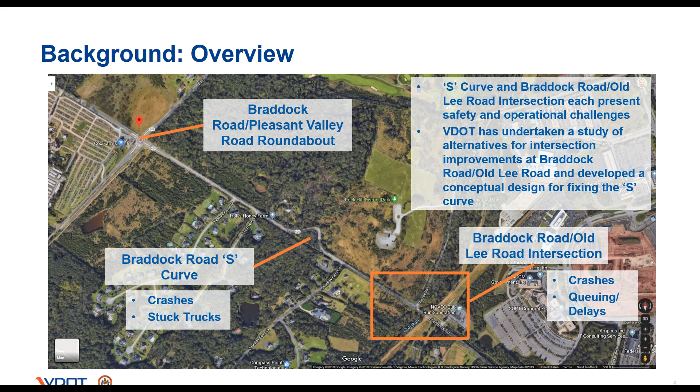Now on to slide 7. And this slide shows the crash history in greater detail, covering the period from 2006 to the present, as well as the number of stuck trucks from 2010 to 2017. In total, during these respective time periods, we had 115 crashes and 18 stuck trucks in the area of the S-curve. We also had 34 crashes at the Braddock and Old Lee intersection, and moving further north on Old Lee, 27 crashes at the curve as you head towards Stonecroft Boulevard.

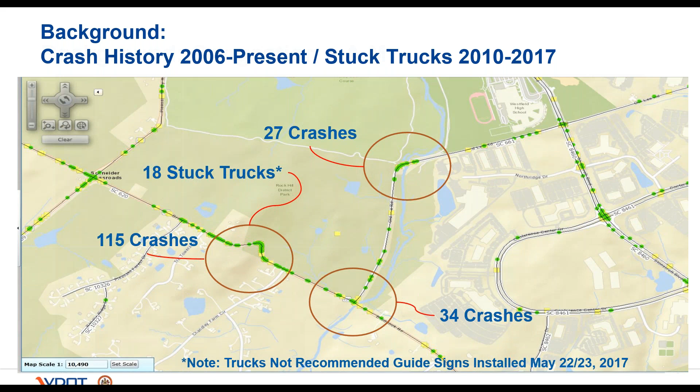Our next slide is slide 8. From a congestion standpoint, in the morning we have a heavy eastbound flow on Braddock, with many vehicles looking to make the eastbound left onto Old Lee Road. This leads to queuing and delays as vehicles wait for an acceptable gap to make their left turn maneuver.

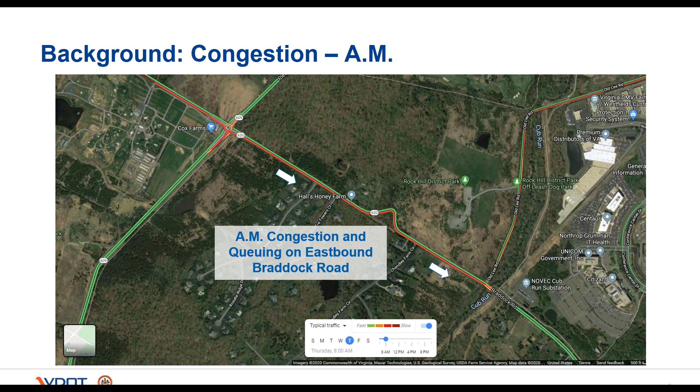Next on slide 9, you can see in the evenings, many of those same vehicles are making the return trip on southbound Old Lee to make a right turn. In addition, there are some vehicles traveling southbound on Old Lee looking to make a left turn on Braddock. And this can exacerbate the situation given the approach configuration that we currently have, and often leads to additional queuing and delays. So as you can see, based on both the crash and congestion data, this location has an existing safety and operational problem that needs to be addressed.

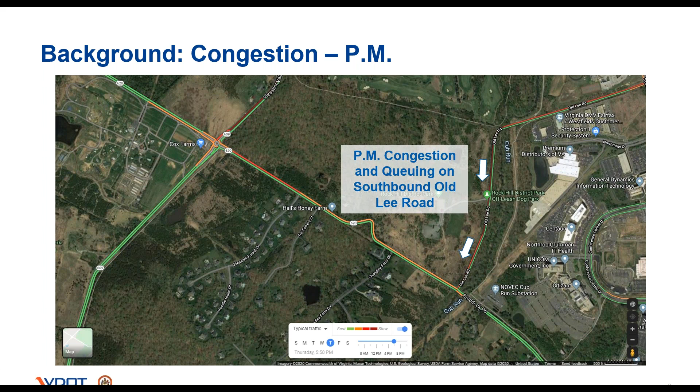Our next slide, slide 10. Given those safety and operational concerns, the study team looked at multiple alternatives to improve the Braddock and Old Lee intersection in conjunction with realigning the S-curve. And each of the alternatives that I'm going to show you focus in on the intersection itself. I would note that none of the alternatives that I'm going to cover have been through an environmental process at this point. As mentioned at the beginning of the presentation, this will occur once a project is funded and preliminary engineering has commenced. And we'll also discuss this in a little bit greater detail later in the presentation.

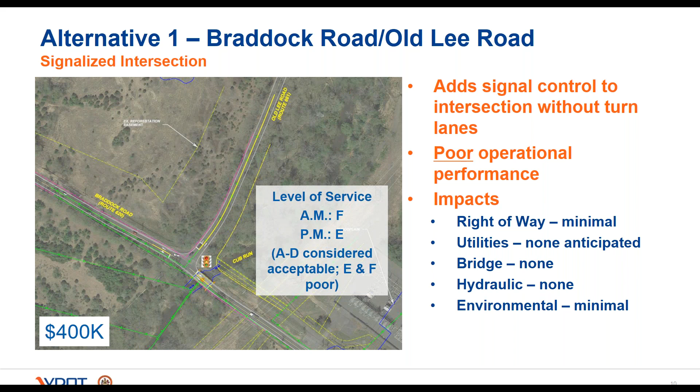Getting on to the first alternative, this alternative adds a traffic signal to the intersection without turn lanes. And while this would be the least impactful in each of the categories that we examined, which includes right-of-way, utilities, bridge impacts, hydraulic, and environmental, our analysis showed that it had poor operational performance with continued queuing and delay into the future.

Moving on to slide 11, our next alternative, alternative 2, added both a signal and a 200-foot southbound turn lane. With this option, we did see an improvement in operations overall, but without geometric improvements along Braddock, the eastbound AM queues still persisted. And impacts increased with the addition of the turn lane, with right-of-way required from Rock Hill District Park and impacts to utilities on the north side of Braddock Road. Stormwater management and environmental impacts would also need to be considered. So moving on to our next slide, slide 12.

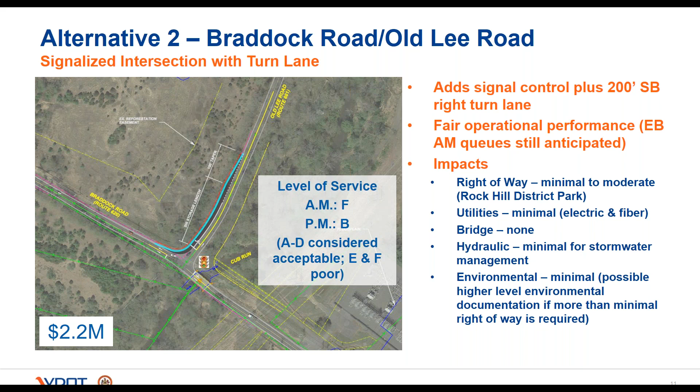Alternative 3 builds on Alternative 2 and adds an 1,100-foot jug handle lane to accommodate eastbound left turns, essentially providing an at-grade ramp to allow jug handle users to make the left turn indirectly. And those who attended our previous meeting in February will recall that this alternative was the staff preferred alternative. And while this alternative does offer fair to good performance from an operational perspective, the jug handle has moderate right-of-way and utility impacts and would potentially require additional hydraulic and environmental studies.

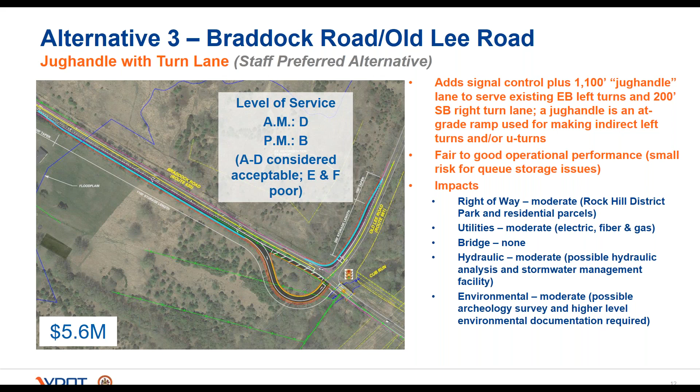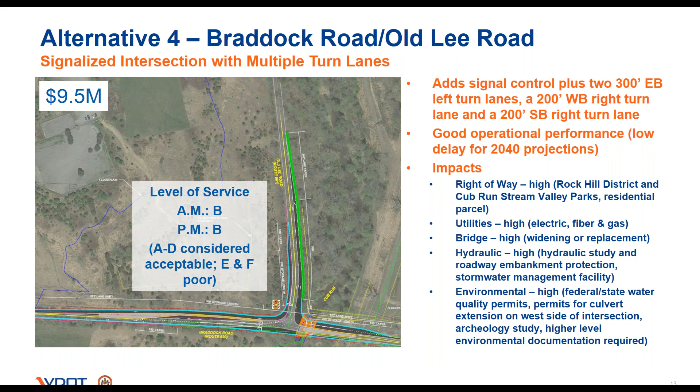For those of you who attended the meeting in February, you may recall that VDOT developed a decision matrix to facilitate choosing the staff preferred alternative. This slide shows a slightly updated version of that matrix, with each alternative receiving a rating for its operational performance, safety, and impacts in the various categories shown. It also includes the implementation schedule for each of the alternatives, as well as costs.

Now, as discussed, Alternative 1 had minimal impacts, but it did have poor operational performance. Alternative 2 had slightly improved performance, but had more impacts, primarily from the southbound right turn lane. Alternative 3 showed fair to good performance with additional impacts on the south side of Braddock, and Alternatives 4 and 5 had good performance, but with additional impacts, including environmental. They also had longer implementation schedules and higher cost. So based on this analysis and the matrix exercise, staff designated Alternative 3 as the preferred alternative.

Moving on to slide 16. Looking at the staff preferred alternative in greater detail, on this slide you can see an updated sketch of the combined project, including the S-curve. The sketch is broken into two halves, with the S-curve shown in the upper left corner and the Braddock Old Lee improvements shown in the lower right.

Again, for the S-curve portion of the project, the curve would be realigned to address the existing issue of crashes and stuck trucks. It would also add a shared use path connection along the north side of the road. And then on the eastern end of the project would be the improvements at Braddock and Old Lee, including the jughandle and southbound right turn lane. And lastly, the shared use path would continue to Old Lee. Moving on to slide 17.

Before we actually discuss the selected alternative for the study, I did want to take a few minutes to go over some of the feedback that we received at the February public information meeting. I will say, in general, feedback was somewhat mixed in terms of the alternatives with no clear consensus. But there were a number of specific items that came up that we did want to address this evening.

So during that meeting, some of you expressed a desire to see the long-term comprehensive plan alignment for Braddock and Old Lee implemented. And there are some very significant challenges associated with this option. First of all, cost. We estimate that this project would cost anywhere from $70 to $80 million, and there are currently no funds allocated to it. Second, we know that the comp plan alignment will have its own environmental impacts requiring evaluation. And we would also note that the revised alignment calls for 4 lanes for the new alignment.

On the slide showing the selected alternative, it says slide 16 or 17. Is all the land on county easements, or does it impact private property in Sully Estates? Okay. So we're talking about this slide. Based on the question, yeah, it says either slide 16 or 17. Okay, and I might ask if our consultant team could speak to that, since they're a little closer to that information.

Yeah, again, these are very early on layouts of the roadway. The one impact to private property is where the actual jughandle is. That would have to be looked at and go through the right-of-way process. However, the remainder of the road, we would need to get additional survey information, and again, we'd definitely minimize the impacts of right-of-way as we got the better information. So the one definite right-of-way impact to property is at the intersection in order to develop the jughandle.

And Andy, this is Tom. I do believe that we would also need right of way to address the S-curve piece. I don't believe that the straightening of the roadway is all in right of way. So I think there would be some right of way required there. Yeah, and the shared use path itself, as currently shown, would require some right of way as well. Okay.

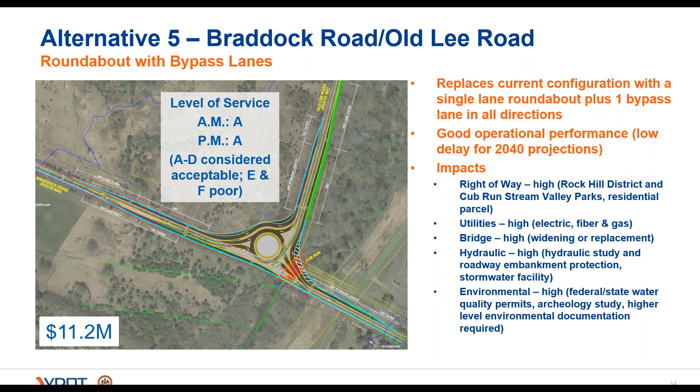Okay, the next one says, where is the data? What is the scale used for the color scheme for the options? Okay, are we talking about the alternatives? That might be it. It doesn't specify. It might be the slide that you had that showed, yep, this one. The matrix? The matrix, that's what I'm thinking, because it says, what is the color scheme used for the options?

Okay, so the legend for that is included at the bottom of the slide. And so green is rated as good. The green and yellow stripes are good to fair, somewhat in between the good and the fair being yellow, and then red is poor.

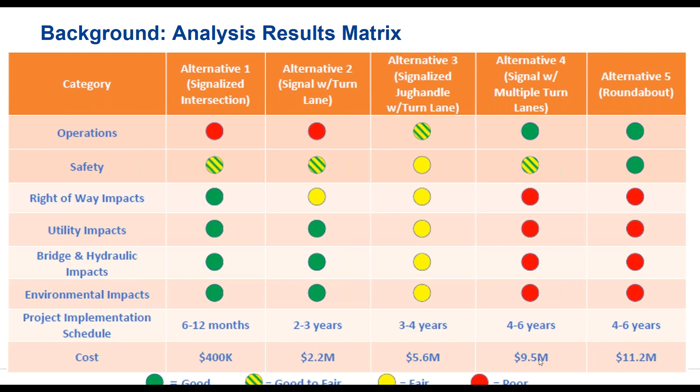Okay, the next one: can you please confirm the deadline to submit comments? I believe the presentation stated October 12th. The news release states October 13th. Okay, yeah, my understanding was that it was the 12th, but I think we can be fairly flexible on that. And if in another location we're showing the 13th, I don't see why we couldn't go with the 13th.

The next question: why would the speed be increased along Braddock Road after the changes? Well, I don't know that we necessarily know if the speed would be increased. I know some folks are concerned about that. What I can say is that when it goes to design, we will certainly design the road at a design speed that is appropriate for the corridor and is consistent, and make sure we're following all applicable guidelines to make sure that it is a safe corridor to travel through.

But exactly what the result of the improvements will be once they're implemented, that's something we would have to monitor.

But just to follow up on that, right now, most of the traffic is operating stop and go during the AM and PM peak because the traffic eastbound in the morning is waiting to make the left turn, and in the evening they're waiting to make the right turn. So if those two situations are addressed, the traffic will actually flow better than what it's doing today.